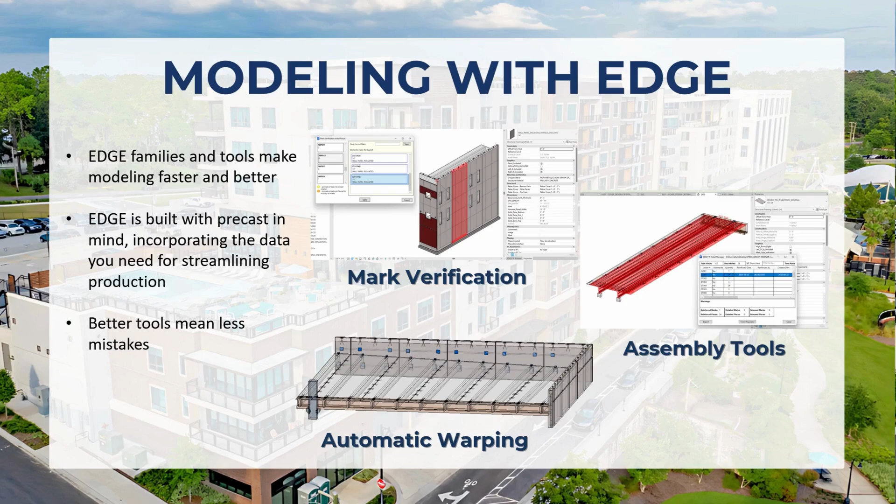Another big modeling feature that we provide, specifically useful in our industry as we work on a lot of parking garages and systems that need proper drainage, is the automatic warping tool. The automatic warping tool works together with the edge content to automate the tedious process of warping your beams across bays in your structure. By placing spot elevations at different defined levels in the model, you can control the exact offset and warp of all of your double T's and beams within that model.

I'm not going to go through every edge tool that we provide here, but I do want to highlight a couple of the more advanced functionalities that we offer. Specifically, I'd like to cover some of the things that we do for reinforcement and some of the things that we do for insulation. These features provide a boost to efficiency that avoids some of the more tedious and time-consuming steps in the process and really builds better data into the model. That is our primary goal here, is to really enrich the model and create this sole source of truth that provides counts, data, and geometry that you can use in and outside of the model.

So first, with our rebar marking utilities, we provide a setting system that's comprehensive and provides customization options to where you can actually define different marking schemes for all of the different producers you work with. You can define prefixes, suffixes, different marking options. There are many different customizations, and you can save different ones for each producer you work with, as well as, as you can see here on the slide, standard rebar settings where you can define specific bends and specific names for that bend in your configuration.

This is invaluable for the purposes of scheduling. This is useful for all kinds of different things and saves a lot of tedium and a lot of possibility for mistakes by taking it fully out of the drafter's hands and putting it into Edge's hands.

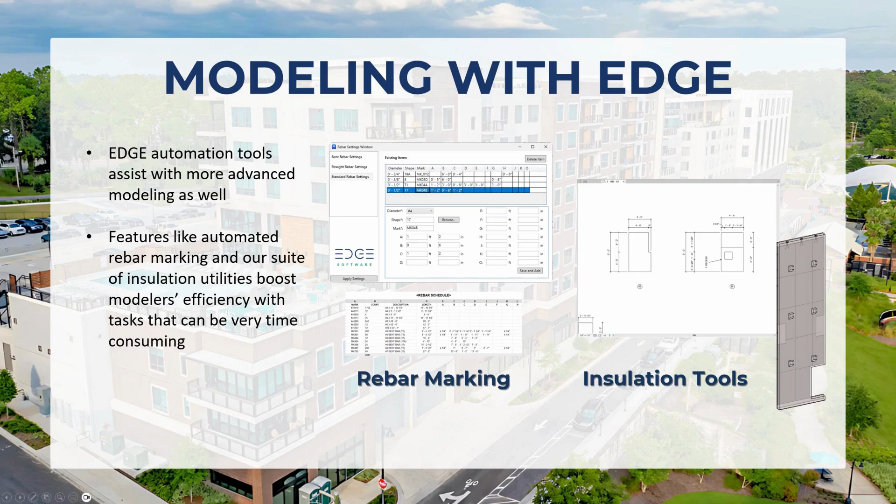There's a lot more tools that Edge provides for modeling, but I want to highlight some of the ways that we build that better data into the DNA of your model.

Beyond the modeling step and moving toward production, I'd like to highlight some of the Edge ticketing features. We have over time produced a robust set of ticketing tools centered around a ticket template system, originally developed with PTAC's use case in mind.

We worked with a lot of different manufacturers, created a large library of ticket templates, and using the Edge tools, we were able to set up view configurations, schedule positions, how we want to stack BOMs, annotations, all kinds of different options saved straight to a settings file.

From that file, we can use the other Edge ticketing tools to actually populate that information straight onto the ticket. One of our biggest core features of the ticketing suite is automatic ticket generation, which provides automatic dimensioning, automatic callouts, and population of the template defined above, creating a sort of one-click ticketing option.

But we know that the computer is not always going to get it right. So we understand that people are going to run auto ticket on their master tickets and then create embellishments, modify things, possibly delete some dimensions, move things around.

Once they have that how they like it, we've provided a newer tool called Clone Ticket. What Clone Ticket will do is take the customization that was done in the initial ticket and then map it to your target assemblies, whether it's 1-to-1, 1-to-5, 1-to-100, you can copy that ticket out to like pieces.

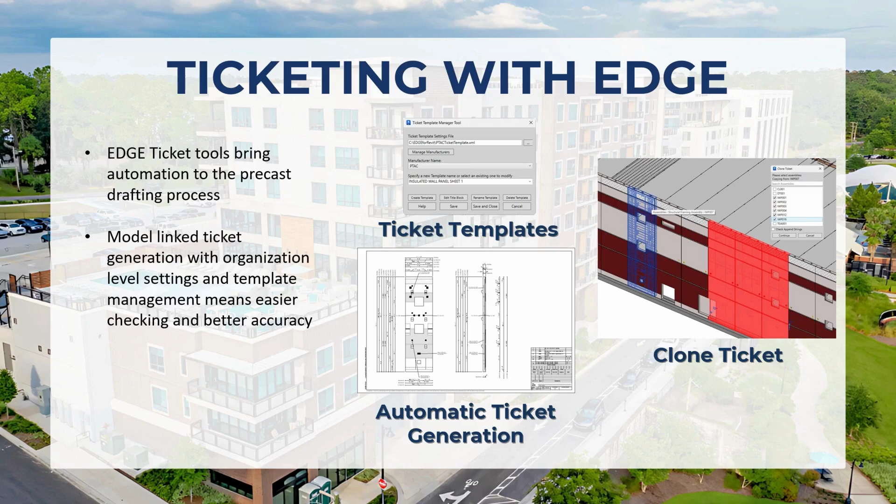Now that you've built your model with all this good data, built your tickets out, and everything is set up and ready to go, you need to find a way to export that data out of the model and get it to the production team.

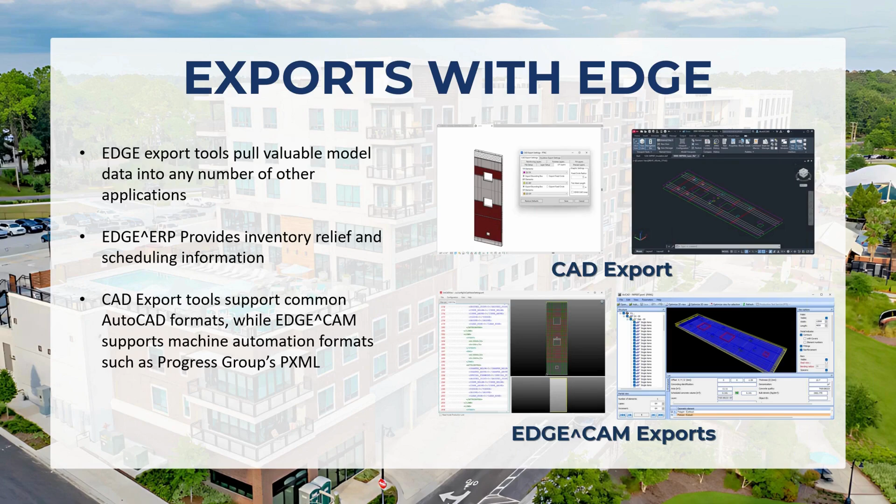There's a lot of different ways that we assist with this. This has always been a priority of Edge's development, is, as the topic of this webinar would suggest, pulling that data out of your model and getting it into the real world, removing it from that data silo, and making sure that the model is built to the highest possible standard and that standard is reflected in the outputs.

Over the years, we've provided a lot of different exports, some custom development for specific customers, some baked into the standard Edge product. I'd like to highlight a few of those here, specifically emphasizing Edge for CAM, which we'll get to in a minute.

First and foremost, we provide one solution called Edge for ERP. It is not shown here in a screenshot, but what it does is actually export piece, assembly, and hardware data from the model to an easily consumed CSV or Excel format. This was originally developed in conjunction with Concrete Vision, so it's out of the box compatible with that system if you happen to use that.

But a lot of different people have adapted it to other use cases because it does provide a very simple Excel file that can be consumed in many ways. This is currently set up as an add-on that can be attached to the Edge suite and can be provided to people who may not even be running Edge if you need to get exports from their machine.

Moving to more of the model data exports, the two that I'd like to highlight are the CAD and CAM exports. The CAD export is fairly self-explanatory, but what it's going to let you do is select your piece assemblies and export them to commonly used AutoCAD formats such as DWG or DXF.

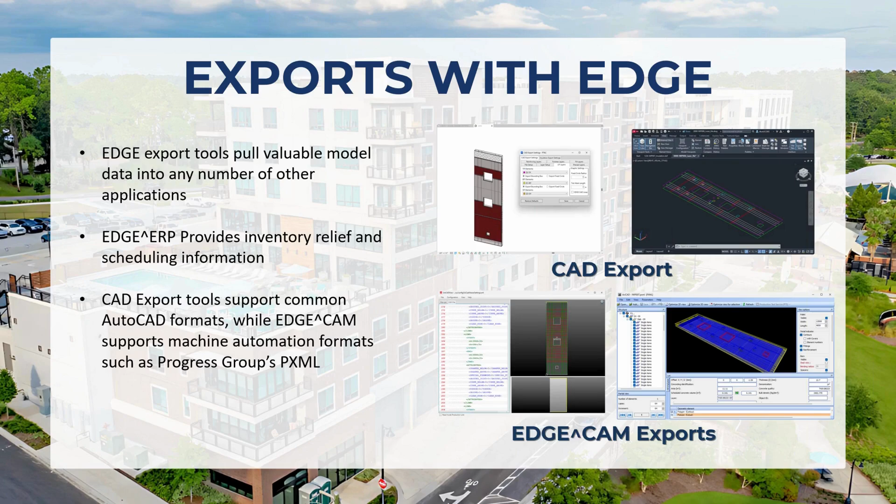Additionally, I'd like to highlight the EDGE^CAM export. This was built fairly early on in Edge's lifecycle with the intent of supporting a lot of different automated machinery applications, the big one being our friends at Progress Group. In pursuit of that, we supported the Progress Group PXML format, as well as Unitechnik's UXML format. This will export information for concrete routing, blockouts, mount parts for your different plates and hardware going into the piece, and bend information for bars, as well as other parameters and data that feed into various machinery applications. This is really another way of taking that data, that model you've built using the other Edge tools, and bringing it out into the real world, into these production scenarios.

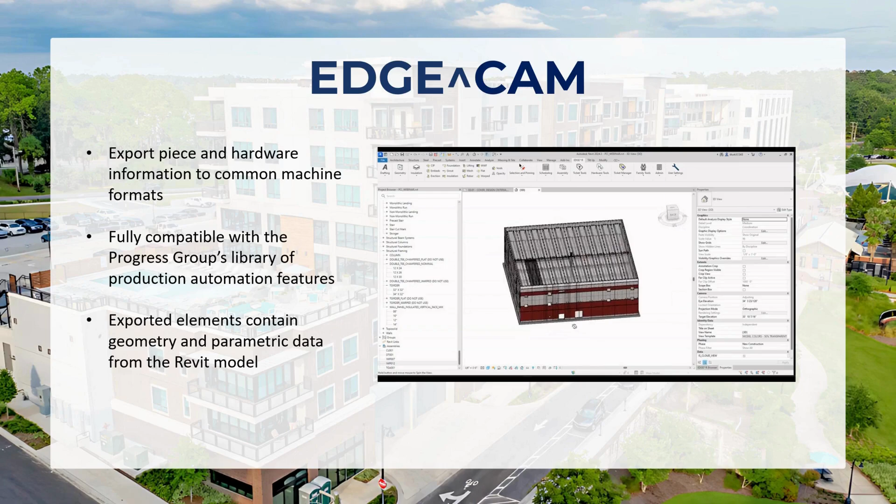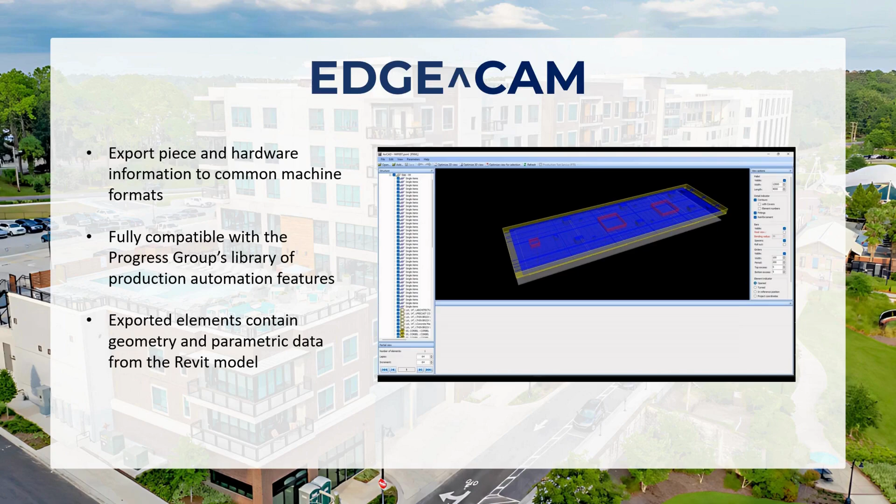Again, highlighting EDGE^CAM, I've created a short video demonstrating the functionality of the tool and showing the export coming straight out of the model. Daniel will be covering more about how that export gets consumed, but I wanted to show a quick demonstration of how that works. We built this in conjunction with Progress Group to make sure it's compatible with their aheadSuite environment. We also have controls within the tool so these exports can be sent out, updated, and overwritten throughout the process of the model, just in case something goes wrong and exports need to be resent.

I think that's the gist of our exports. At this point, I'd like to go ahead and transition to our next speaker, and I'll let him take the screen.

Thank you, Doug. So as introduced before, my name is Daniel Perrier from Progress Group. Perhaps some of you already know us from our machine department, as a big portion of our business is producing and supplying different kinds of machinery for the precast industry. For example, mesh bending or stirrup bending and welding solutions, full carousel systems, but also, mainly in the US, a lot of different technologies like plotters, extruders, and slip formers for long bed and tilting table production.

Today I'd also like to show and explain a bit what we are doing in the area of software development, specifically around our planning and scheduling solution, the aheadSuite, which is an integral part in a precast company, consuming, like Doug explained before, all of that exported CAD data, where we have the exact 3D model of how the elements should be produced with all the details and components within it. With that information, we can do very detailed delivery, production, and warehouse planning upfront, while also forwarding and feeding that to all kinds of different machinery you may have in the factory, so we can achieve a very high level of optimization in the factory.

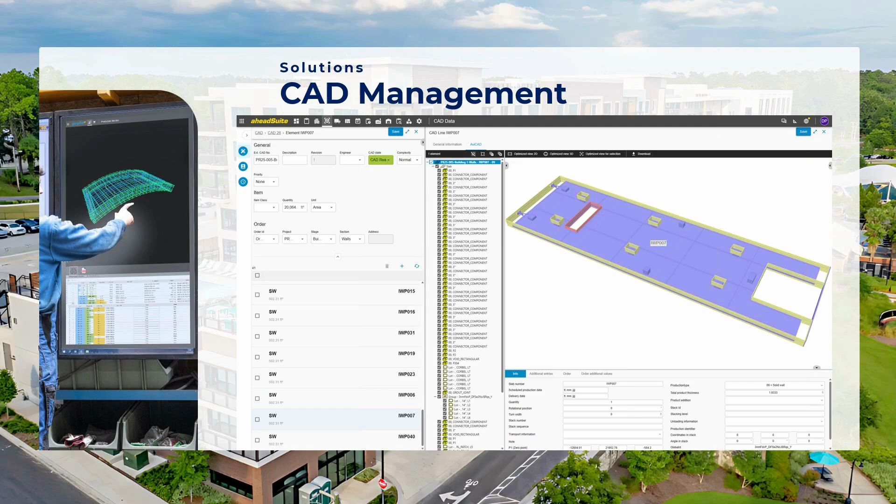With that, we emphasize always that for us a big focus is to use those 3D models to really have a model-based workflow. So all of our functionality is heavily driven by that data.

For example, in our stack planning and delivery planning solution, we can use again these details to have a better understanding of which elements we are going to ship together, what is the maximum weight we can ship, how we can stack and combine elements on the truckload, so that we can better plan which elements in a later moment we want to keep together also during production.

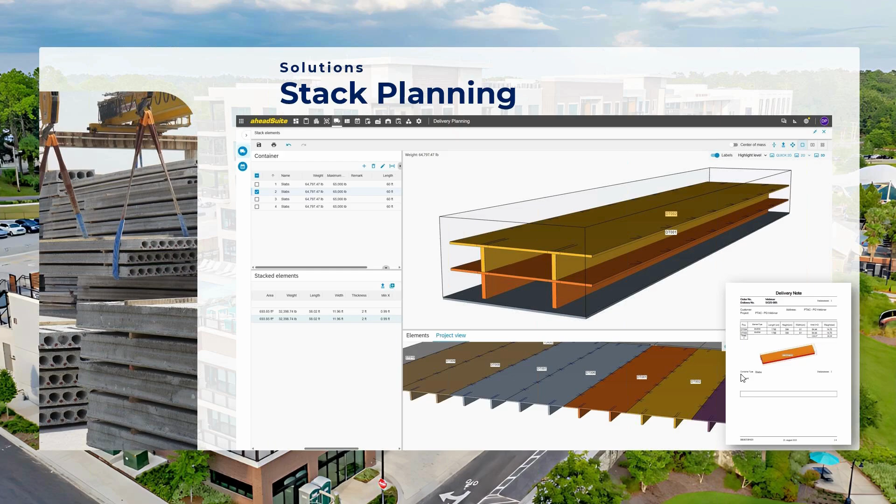Out of that, we can then also create delivery documents with pictures and other additional information, completely customized to your layouts.

That is then also an important point for our production planning here. For example, I've put in a screenshot of our layout planning. It's a much more advanced solution, where you don't only plan when and where, on which work centers I'm going to produce, on which days I'm going to produce the elements, but also do the exact detailed layouts.

So in which specific position I'm going to produce that element, because often it's very important to plan how I can combine the elements. For example, talking about what we do a lot in Americas, the pre-stressed hollow cores, there are a lot of different things to consider, the different strand patterns, the cross-section types, if they all are compatible with each other.

And then with that information, we can then feed in a later moment also a lot of different machineries, like explained in the beginning, plotters, laser systems, extruders, and any other kind of machinery, as well as provide them also with the details of the reinforcement that needs to be produced.

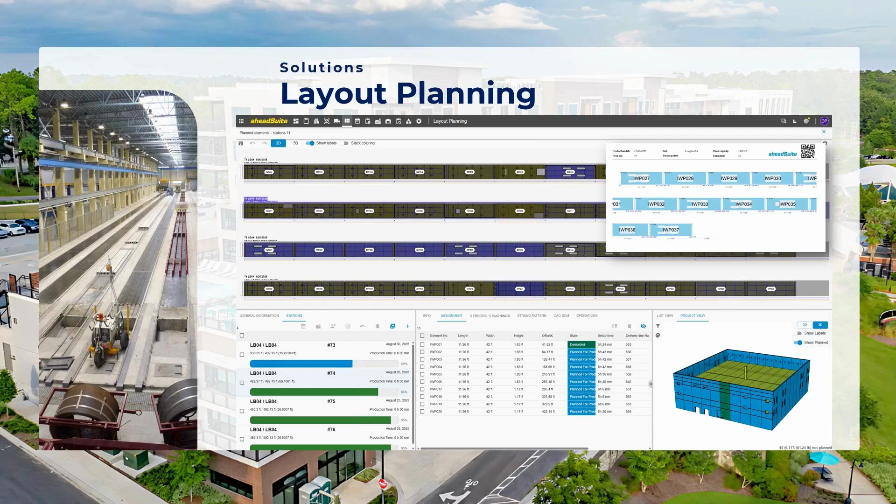But that's not everything. I explained also the factory interfaces, so what we can integrate. A lot of the machineries can also be supplied by the Progress Group itself, but we of course then support all kinds of different suppliers from different equipment.

What we recently developed is also some AI camera systems that take pictures of how the elements are currently positioned, and then with AI components verify if different mount parts, electrical sockets, reinforcement, and so on is correctly placed or perhaps completely missing. That's all based on the bed layouts and the 3D models that we received upfront.

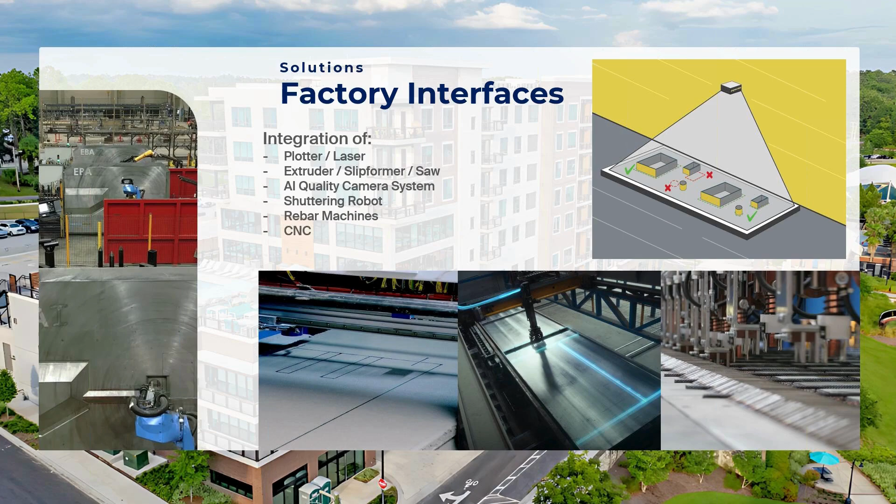But not only that, we also do a lot of additions on a mobile application. We have a dedicated application and devices for usage in the factory, on the stockyard, during transportation, and also directly on the construction site.

For example, a functionality that is very important is to do status tracking, so that I can scan QR codes and barcodes, see the details of the elements, but also track in which state they are currently in.

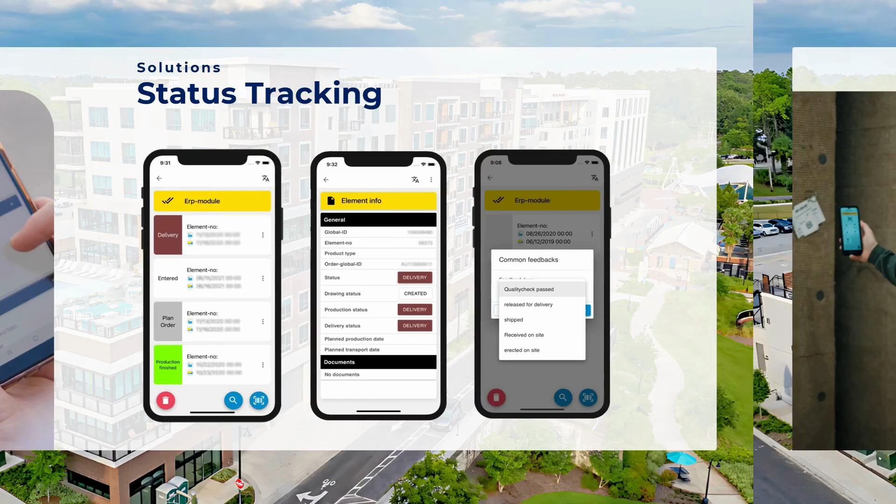As well as a topic that is coming more and more, doing quality checks directly in the different steps of production, where you have the possibility to completely customize what kind of quality checks are important for you. Quality checks can be very simple, if I've done this, this, and this, or if you want to do some measurements, alphanumerical, numerical measurements, taking pictures.

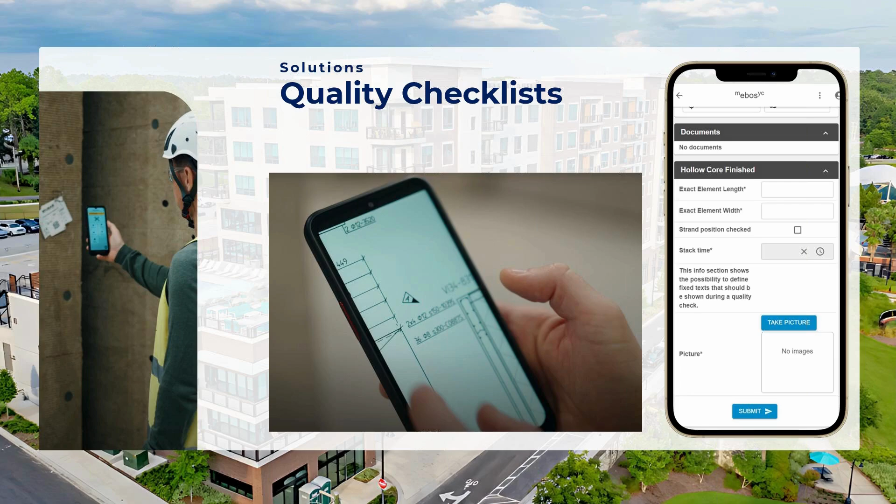All that while also having over the mobile phone the possibility to review directly the shop drawings that, for example, have been created upfront by the Edge system.

All of that information at the end, also with the feedbacks from the machinery, the feedbacks from the mobile app, and whatever is happening on the stockyard and the construction site, that's all feeding back into our aheadSuite, where we have then the full possibility to show in which state the current elements are in, giving a big overview about how your projects are moving along, if there are any delays, or if anything needs to be adjusted, so that you can keep the ultimate goal, that is to deliver on time and finish the project within the scope that was originally agreed.

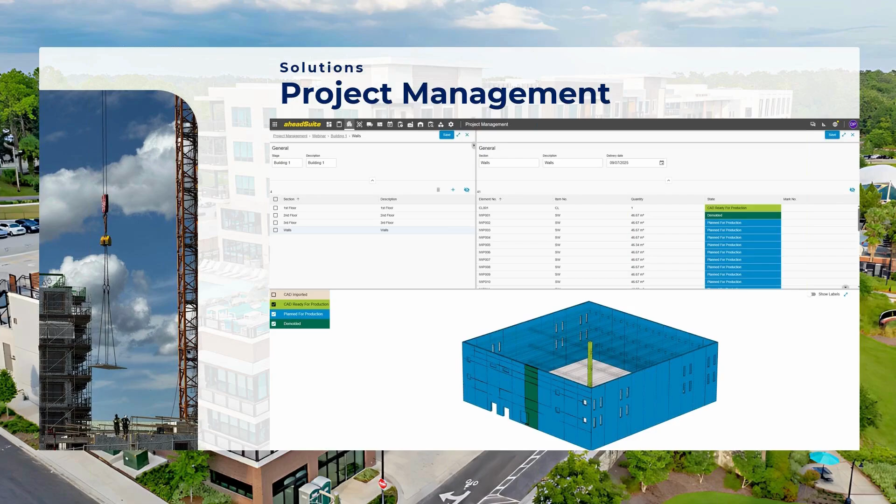At the end of the day, the idea is that we can take all of that information in and create within the solution a digital twin of your entire projects. I've created also a very short video that I would like to show you.

That is basically our demo system, where I've taken the model that Doug prepared in Revit, exported with the Edge, and imported that into our solution, where I can then review it as a project overview, a 3D model, and do some production planning.

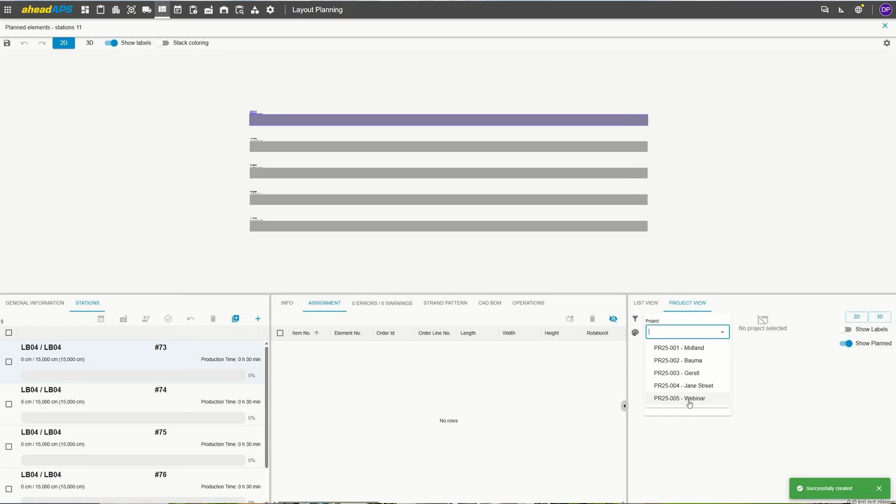So here I'm creating now some long beds. I see here again the 3D model of the data. I can then very quickly, by clicking through the elements, add them to our long beds based on predefined rules that are customer specific. So the system is automatically calculating what would be the best possible solution if they need to be rotated or positioned in any other way.

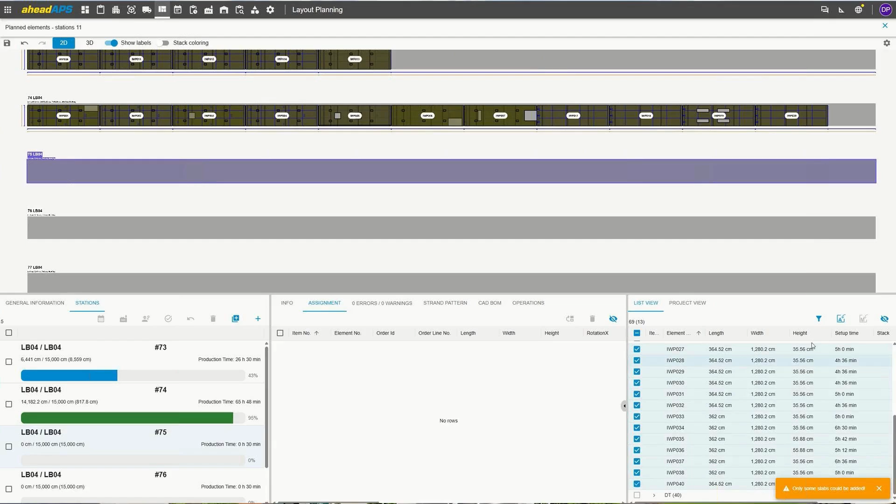So I can then also select a bigger size batch of elements and have the system automatically calculate and do all the bed layouts, depending on what is my priority in the different terms of how I can optimize that in the best possible way.

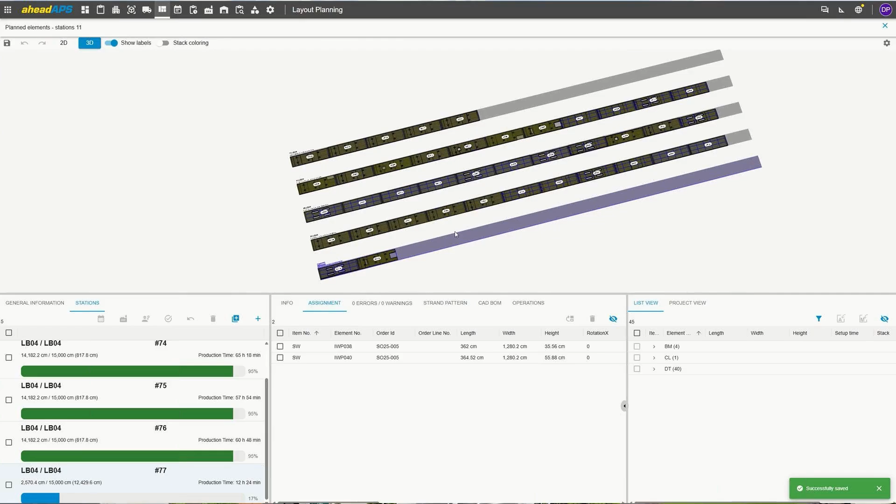Afterwards, I have then all the flexibility to do any kind of adjustments, move that around. With the 3D models, I have then also the full flexibility to review the exact positions with all the components that we were receiving from the Edge tool out of the CAD system, and can do very easily any kind of adjustments.

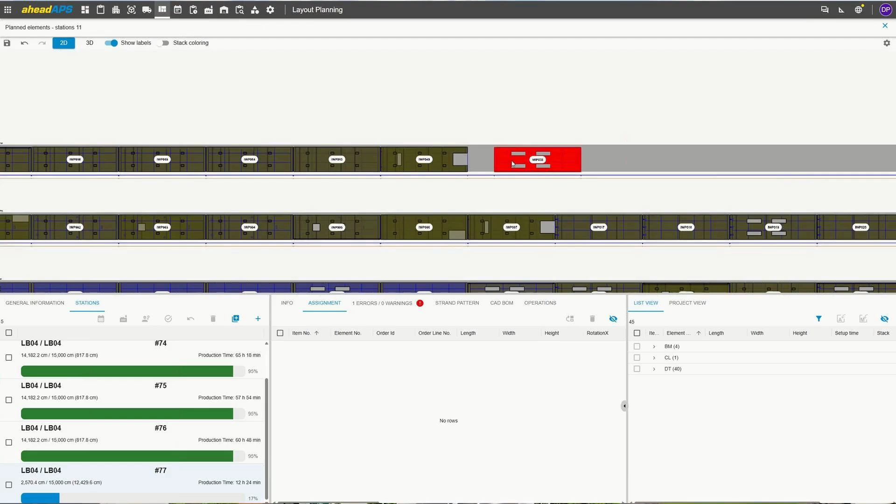And also, like we see here on the video, if I do any kind of misplacement, as I've moved that perhaps a little bit outside of the bed, the system is constantly doing checks if the positioning is valid, if the elements are also compatible with each other, and therefore can immediately warn me if there's any potential risks in that sense.

So here then I see also the different states and can review in total the model again. And afterwards I have then the full possibility to create any kind of printouts if I want to provide a PDF with a bed layout.

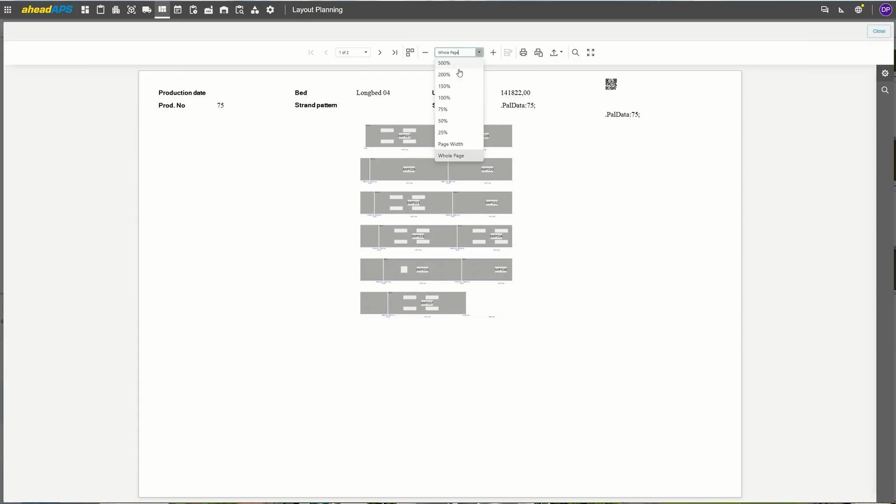Of course, that has then to be seen, what is how the look of the printout needs to be done, and I can do then a detailed planning of when exactly do I want to produce that bed layout.

So I see also while I'm doing that what other kind of beds have already been scheduled on the specific day. So when is the next available date that I can produce them, as well as always keeping in mind what is the earliest delivery date for all the elements that I've put on that bed.

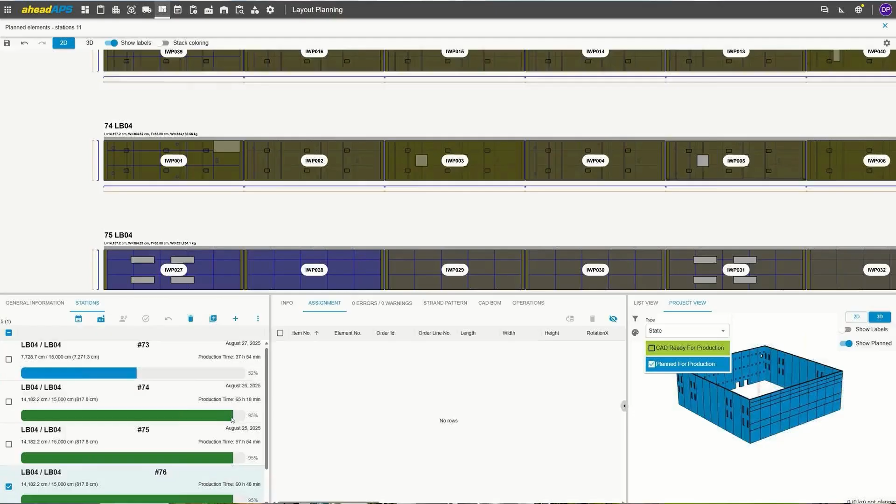Because I have here the full flexibility also to add elements from different projects. Doesn't need to be from the same building, doesn't need to be from the same transport unit. So I can have here the full flexibility to do any kind of combinations, whatever I want to do in the factory.

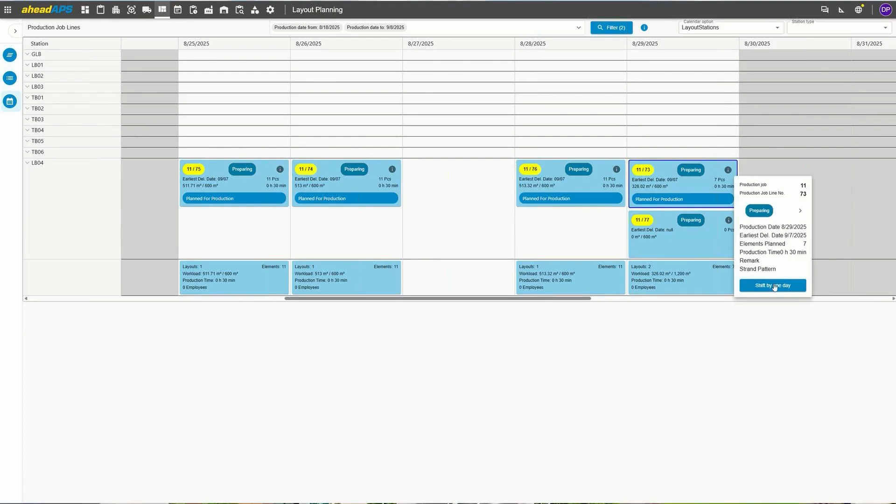And I've also here done very easily with a calendar overview the possibility to do planning and shifting the beds around the different calendar days and to review again what is the bed layout in itself. You can do here very quick adjustments then.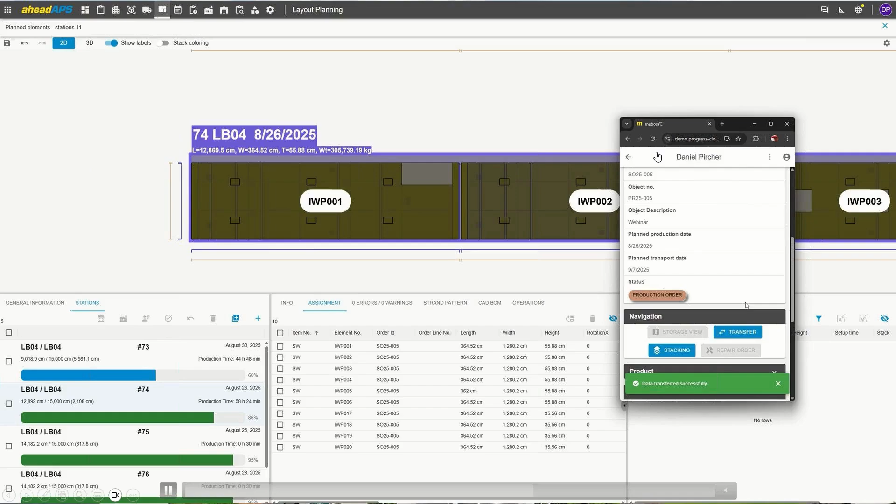I will skip here a bit as I would like also to show you the mobile application. So I opened it here as well as on browser, but you can imagine as if that would be on a phone, then the possibility to review the details of an element, change the status of that, have here then also the quality checklist.

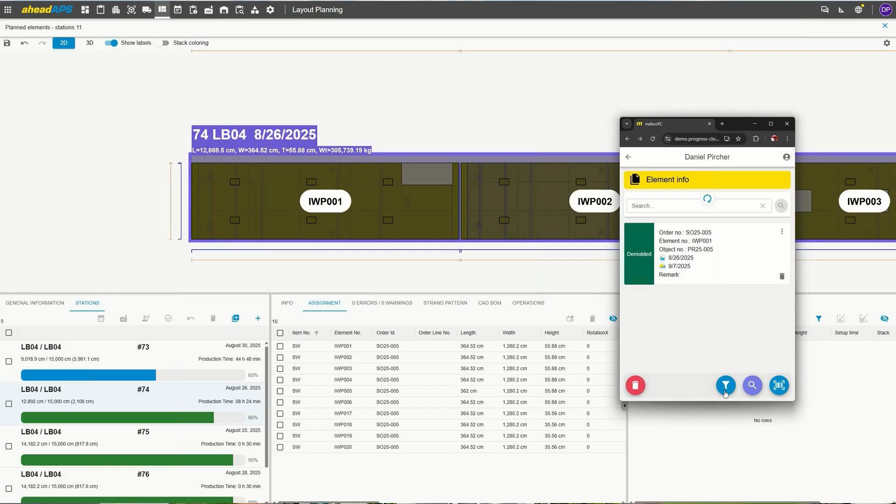That is something very simplistic. We can then also take pictures. Here I opened the web camera from myself, but just like that, with the mobile app, I can then do any kind of very customer specific quality checks, do status updates, and move along the production steps in the factory.

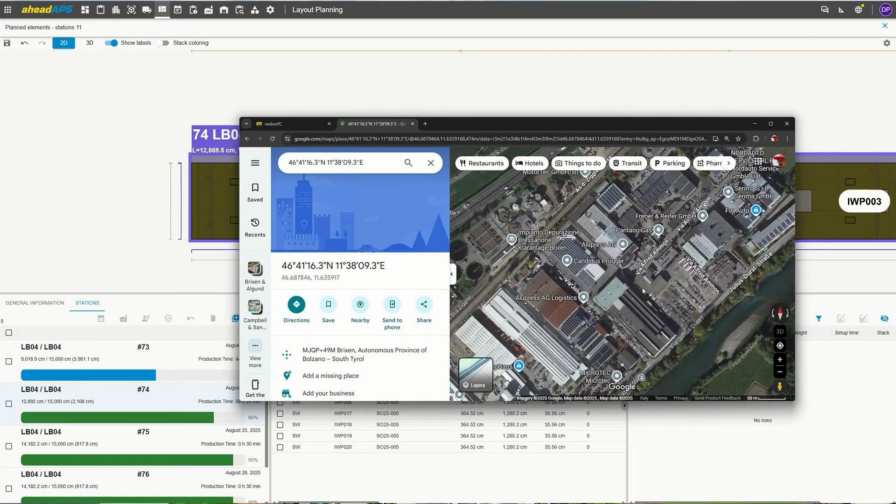I have also here then some storage possibilities where I can save also GPS coordinates, and let's see that again on the map. So you can see here on Google Maps our headquarters that is located in Italy was used as a GPS coordinate, but just like that, I can store that information as well as any other kind of transfers for our storage map directly with our mobile application.

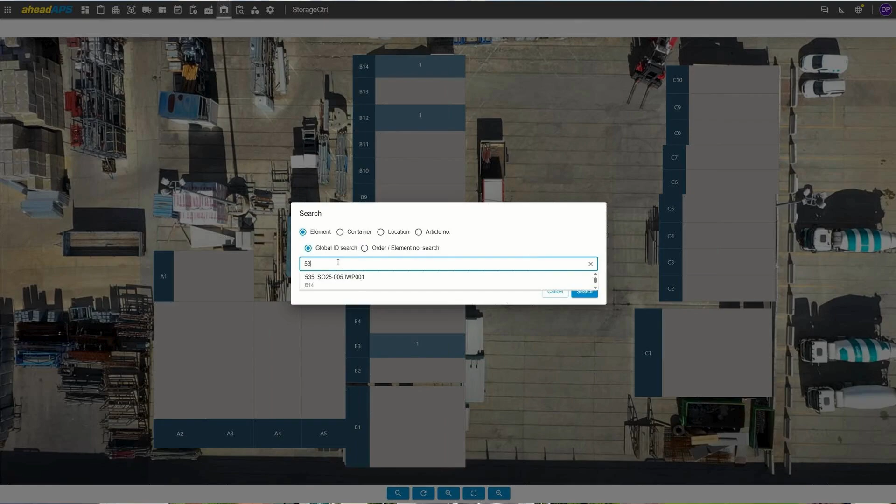And review that in real time then later as well, not only in the mobile app, but also in our aheadAPS solution, where that gives me then a big benefit that after I've placed the element and put them on storage, I can also very quickly search where they have been placed.

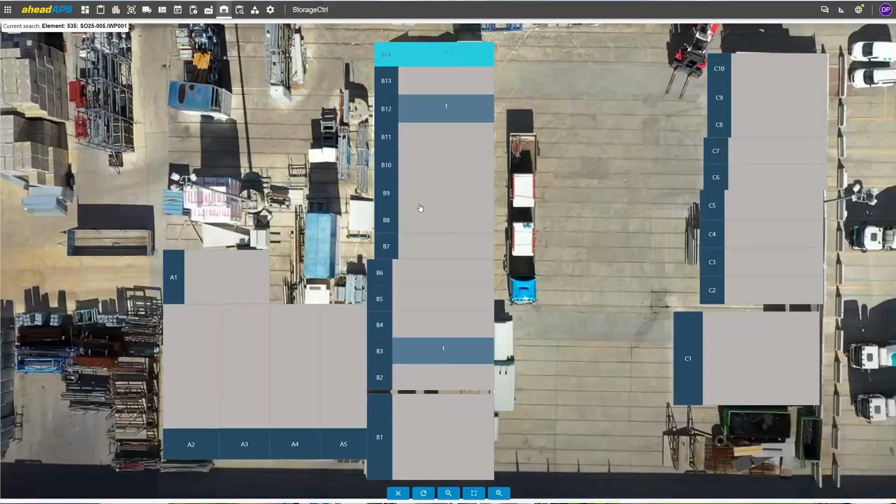And that is all going back to one system in the end where we have all the details of our projects, of our buildings. Everything that I did now in those five minutes, I can also review in our project management tool where I see the different colors indicating the different states of the individual elements, and have at the end of the day a digital twin of my complete projects within our solution.

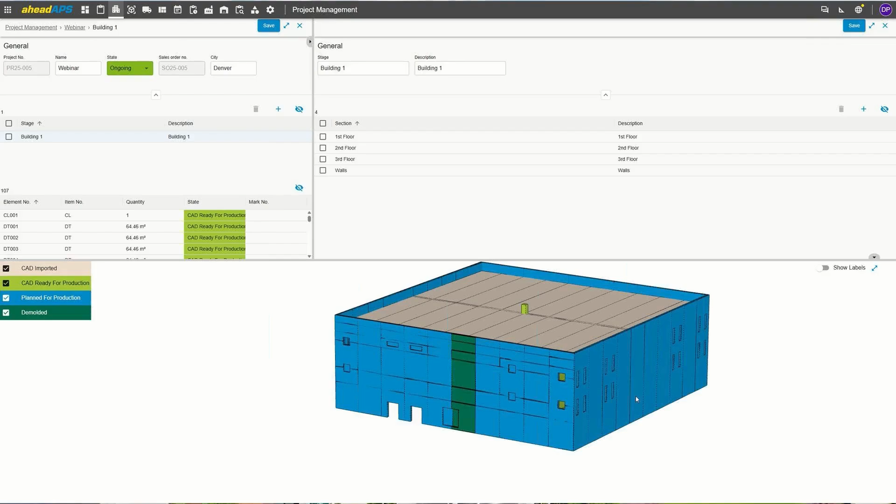Like I said, this is on a high level. There are a lot of other functionalities for rebar producers, for other kinds of production capabilities. I just wanted to give you a quick highlight of what we can do in our software solution, all based on the 3D data and the total information that we can extract from the CAD solutions.

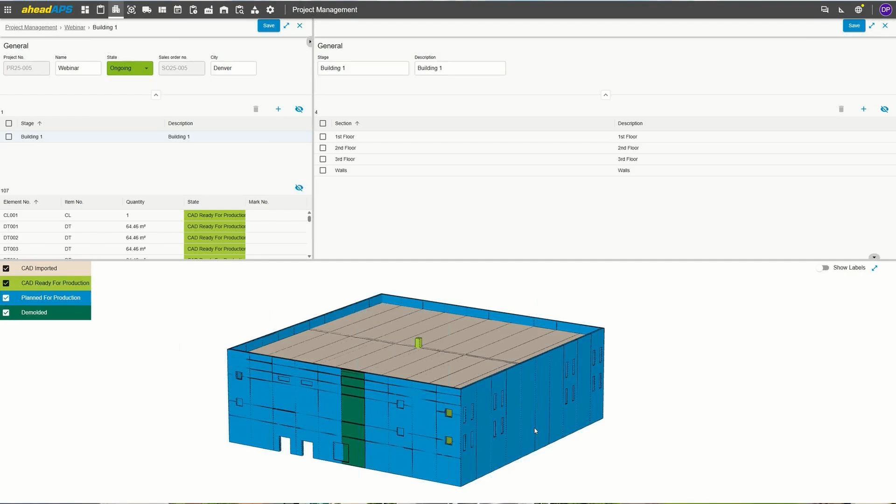So that's a bit from our side. I think next up, I don't know, Trice or Doug, if you wanted to do the key takeaways.

By putting connected data at the center of the process, our export tools and ERP integration ensure that model data flows seamlessly into production, scheduling, and machine automation formats, such as Progress Group's PXML. The result is a streamlined model-to-production workflow, one that reduces mistakes, improves collaboration, and ultimately helps precast producers stay competitive and deliver real world value.